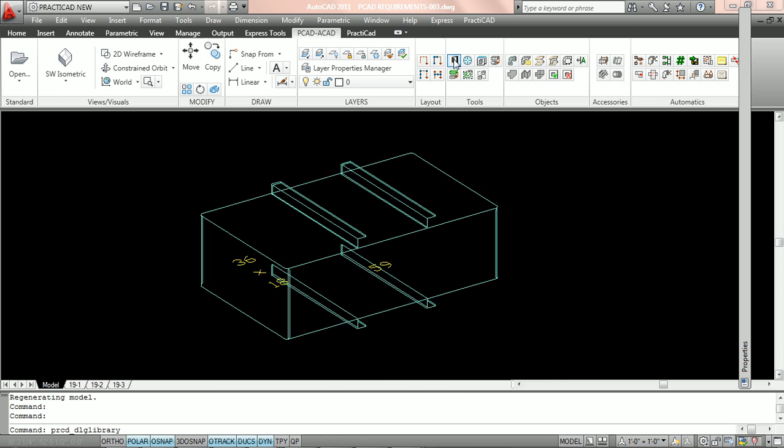In order to design a stiffener, we must go into the library icon on the PractiCAD ribbon. We're going to open up our library and come over to the left to our browser. We're going to scroll down till we get to accessories, hit the little plus key, and come down to where it says stiffener. We're going to click on the word stiffener.

When we do that, PractiCAD is going to show you a drop-down menu of all your available stiffeners. You're also going to be given the opportunity to import your stiffeners from PractiCam. However, if you would like to create a new one, you must come over to the left and click on the Create a New Item green check.

Once we do that, PractiCAD is going to ask you to name the stiffener. Here we're going to name it PCAD Stiffener and hit Enter.

Now what we're going to do is select all the parameters we have on the top and bottom choices, and we'll go over them one at a time in the following tutorial.

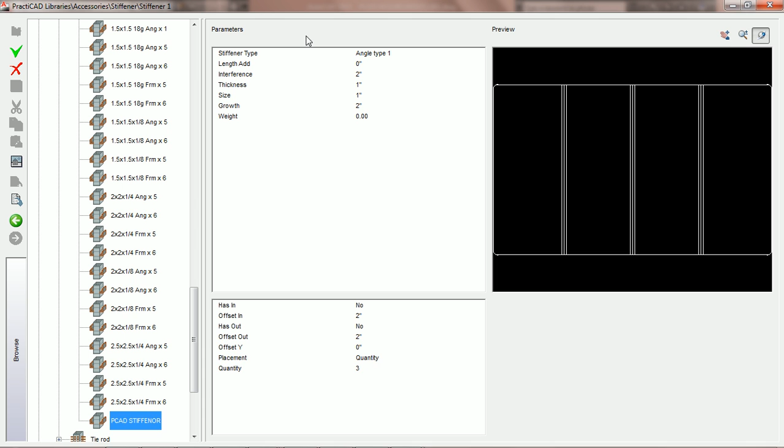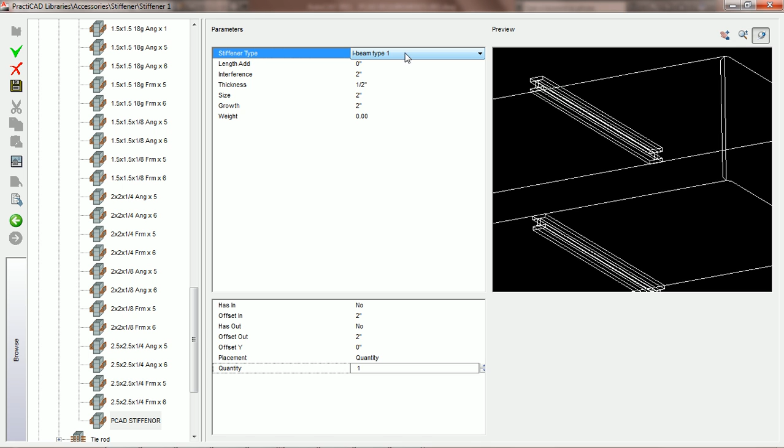The first parameter we have is the option to choose our stiffener type. We can select between any one PractiCAD offers. Here you can see we have an angle type 1 on the drawing. We might switch it to an L bracket, and for much of this tutorial we're going to work with an I-beam type 1. We have channels, hats, Z-beams. Just look through your list of choices, select the one you want, and PractiCAD will display it in the preview.

The length add parameter allows us to choose a value that will dictate how far the stiffener sticks out of either end of the fitting. For example, right now we have the length add parameter set at 0. That means that the stiffener is flush with the side of the duct. It is not sticking out at all.

However, if we were to give a value here like 4 inches, that would mean that on either end of the fitting we have 4 inches of stiffener sticking out.

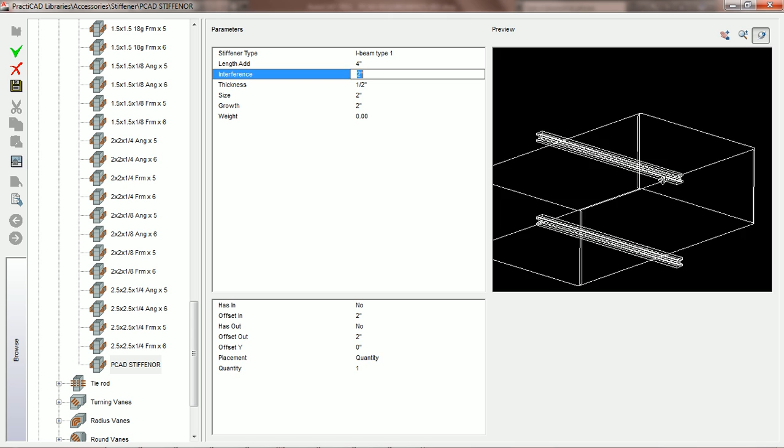The interference parameter makes sure that when you go to place stiffeners on the width and the depth of the fitting, those stiffeners do not interfere with each other. The value you put in here will be the distance between the stiffeners on the depth from the stiffeners on the width.

For example, if we were to put in the interference 6 inches and we were to put stiffeners on both the width and depth and measure the distance between them, you would know they are never closer than 6 inches. That is the value of interference.

We're going to exit out of this screen. Here on the drawing we have duct with the PCAD stiffener on both the width and the depth. You can see here, looking in plan view, that the distance between the stiffeners on the width and the stiffeners on the depth is always going to be 6 inches or greater. That's the interference. It means nothing less than 6 inches is allowed in between two stiffeners on both width and depth.

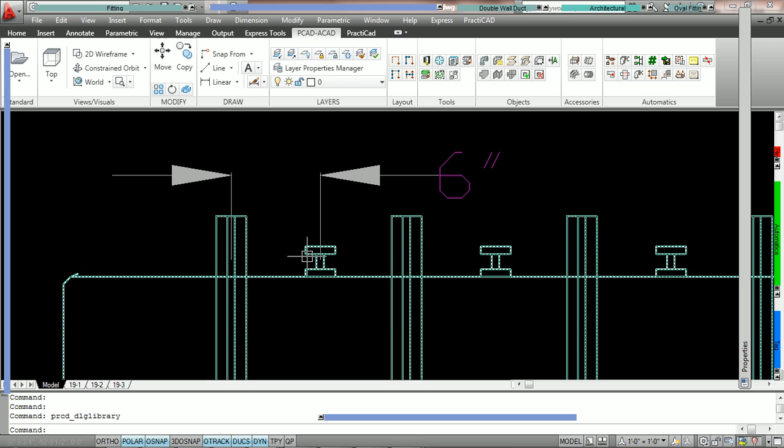The next 3 parameters, thickness, size, and growth, will control the overall appearance of the stiffener itself. Thickness means the thickness of the overall stiffener. Right now in the I-beam you've got 3 parts, the top, center, and bottom, and if we measured how big each of those parts were, they would be 1/4 inch thick. If we switch it to 1/2 inch, now you'd have 1/2 inch thick on each part.

Then we've got size. The size parameter is basically going to control the width. Here we're rolling up with the wheel mouse, and you can see that it's getting larger. Now we're going to roll down, and it's going to get smaller.

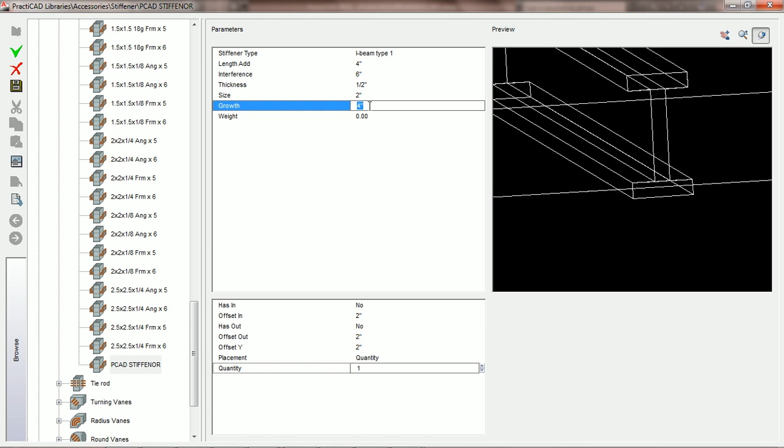The growth would do the height. If we raise the growth, you can see the stiffener is getting taller. If we lower the growth, you can see the stiffener is getting shorter. So we choose our sizing parameters: thickness, size, and growth.

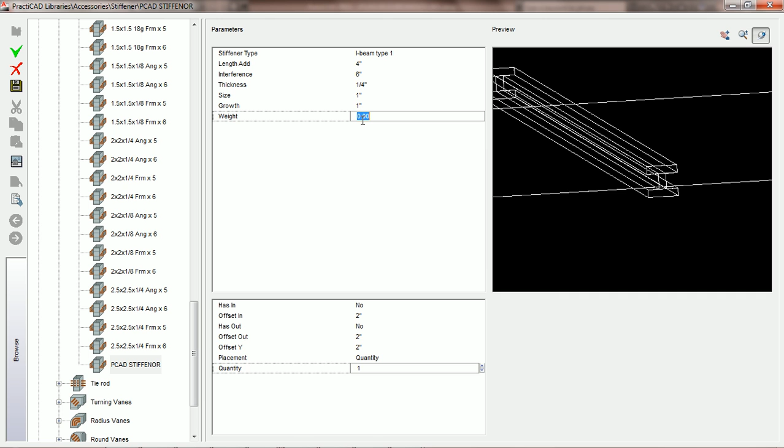The last parameter we currently have for the common parameters is the weight. PractiCAD is capable of calculating the weight of an entire duct line, and if you'd like the stiffeners accounted for when calculating that weight, you need to put in the weight for each stiffener. In PractiCam, under external stiffeners and common parameters, we have weight pounds per foot, and whatever we put here is the same number we'd want in PractiCAD to get the proper weight.

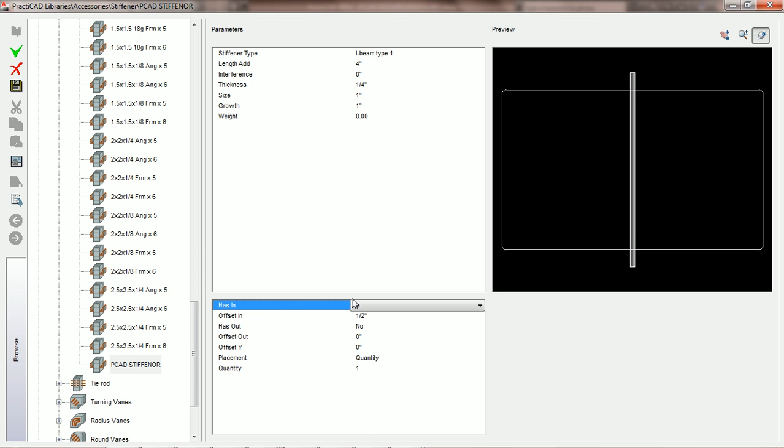The parameters we have on the bottom here are what we call the placement parameters in PractiCAD. Here you can see the placement parameters: has in, offset in, has out, offset Y, placement, and quantity. We have the same ones inside PractiCAD.

The first four we're going to cover are has in and offset in, and has out and offset out. Currently we only have one stiffener in the center of the duct, quantity 1, as notated by placement and quantity. However, we can also choose whether or not this stiffener type will get stiffeners on the in joint or on the out joint. All we have to do is say if we want one on the in joint, has in yes, and it's going to appear. After it appears, you can choose how far the offset will be from the in.

Currently it's set at a half an inch. However, if we move this to 4 inches, it would move this stiffener 4 inches to the right, all the way to the end of the duct. Same thing with the has out. If we took has out and said yes, we would now get a stiffener right here on the end. You can see that the offset out is 0. We're now going to make it 6 inches, and that's going to move this 6 inches in the opposite direction down the fitting. So utilizing our has in, has out, and the offsets, we can choose where we'd like stiffeners on the in joints or the out joints.

The offset Y parameter controls the center stiffener. If we were to move it up in value, positive numbers would move it away from the center to the right, and if we were to move it down, negative values would move it away from the center to the left. We can simply put it at 0, which would normally be the center line of the duct, or we could choose the value offset we'd like to have.

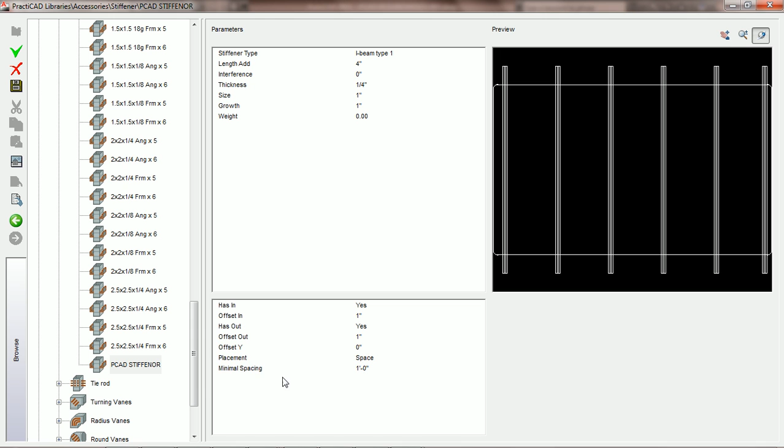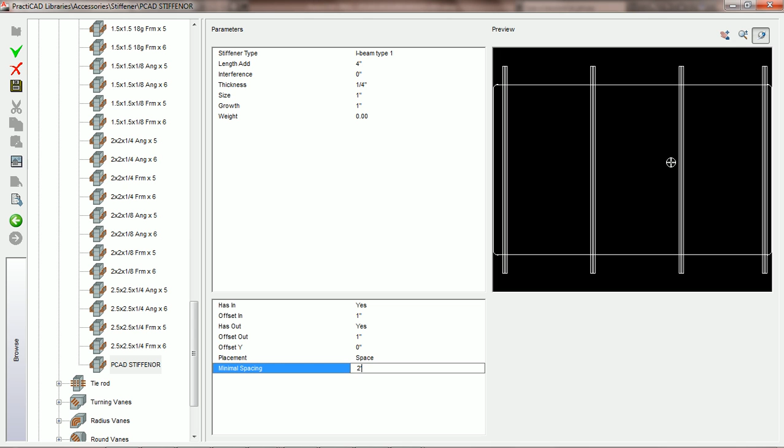This is different than choosing the placement method space. When we do that, PractiCAD simply asks us for the minimal spacing we need. You can see it switched the parameter here, and now we can choose whatever the minimal spacing is. If we were to say 2 feet, that means the minimal spacing we should have is 2 feet, and we're going to get at least 2 feet between each stiffener, replicating the stiffener from the center line out, making sure we have no less than 2 feet of space between. So you can choose the quantity method for placement or the space method for placement.